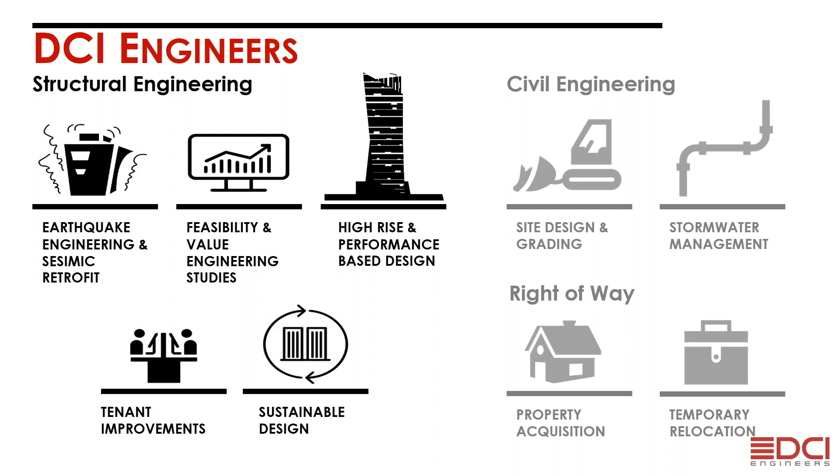But what we want to focus on today is different types of prefabrication and modular innovations and technologies that are being used. Some of these are already prevalent in the market. Precast concrete is obviously one that is used in a lot of parking garages. As concrete products go, there's also tilt-up concrete, which is typically used in warehouses, and there's the speed of fabrication of these elements as well as getting them on site to reduce the amount of labor needed to perform the construction.

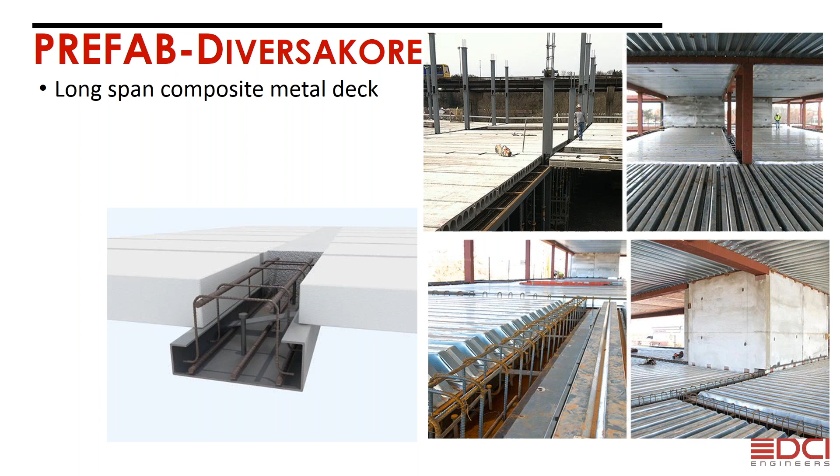Then we get into DiversaKore, a product that we use as well, combining the best of steel and concrete to give us longer floor spans and a more structurally efficient floor plate. Another proprietary product that we use on our projects is ConXtech, and the advantage here is that there's no welding, it's all bolted connections, so a lot less special inspections on site, which means less cost for the contractor, and they also go up very quick.

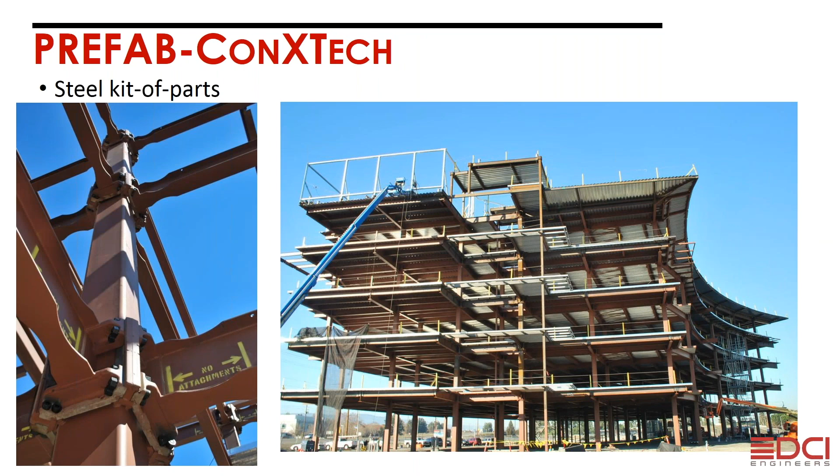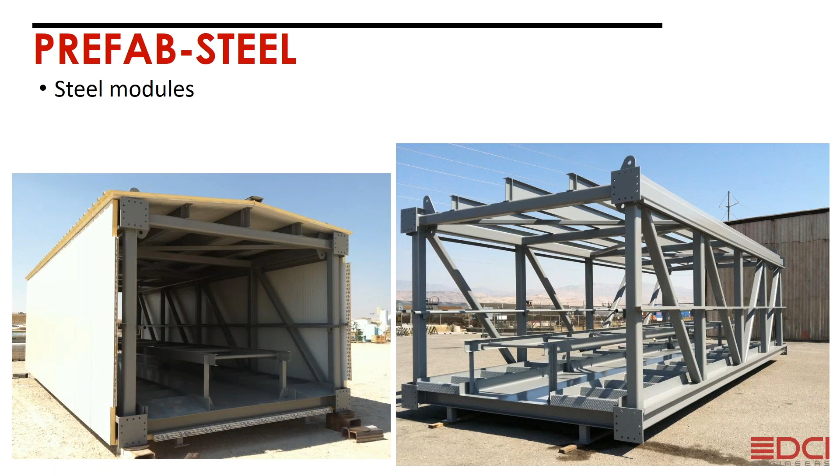Another thing DCI is very familiar with is steel module construction, where maybe it's a cold weather environment or a manufacturing facility that can't afford to have its facilities down for a couple of weeks and needs to perform a retrofit or construction over the span of a weekend. So we come up with these full-blown modules to be installed.

As far as modular and prefab, there's also a term referred to as kit of parts system, and we've had the privilege to work with Collins Woerman Architecture up in Seattle on this project. It's the Sustainable Living Innovation System, and as you can see in these pictures, your kit of parts building goes up kind of like Legos, where the beams and columns are installed, and then the floor plate is integrated with the MEP and utilities. This allows a very efficient project. It's very fast to install, and it's also robust with long floor spans.

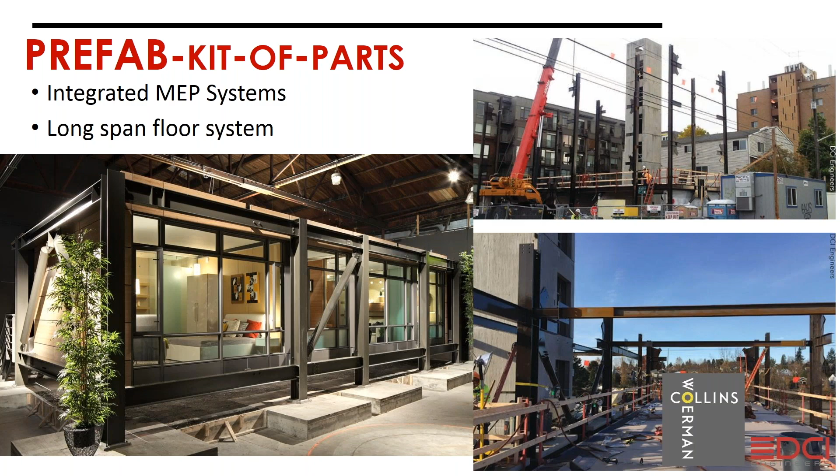But backing down into the more ubiquitous materials that we use in everyday construction for the majority of our projects, a lot of light frame materials, even with these we're seeing a lot more prefabrication. We see a lot of prefabricated walls, where the wall panels are prefabricated off-site, shipped to site on the back of a truck bed, as you can see here, and then installed.

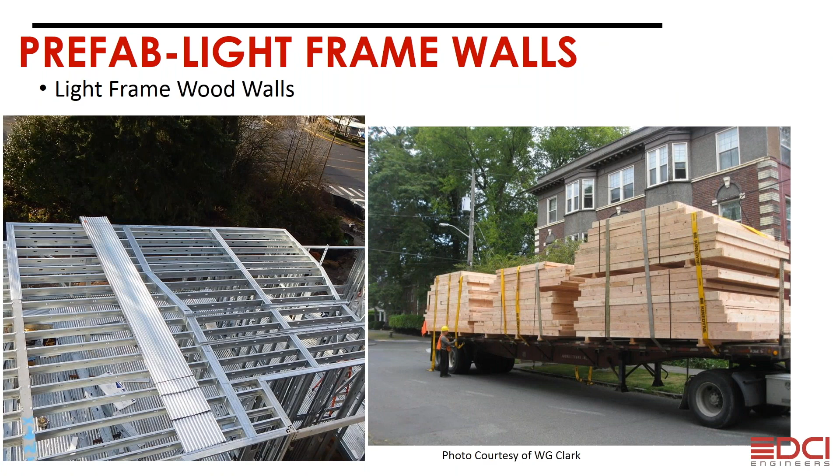If we take that one step further, we also do full-blown modular, or as other people call it, volumetric modular, where the whole unit is integrated. It can even have furniture installed if you wanted it to. These are brought on the back of a truck bed and then lifted up into place.

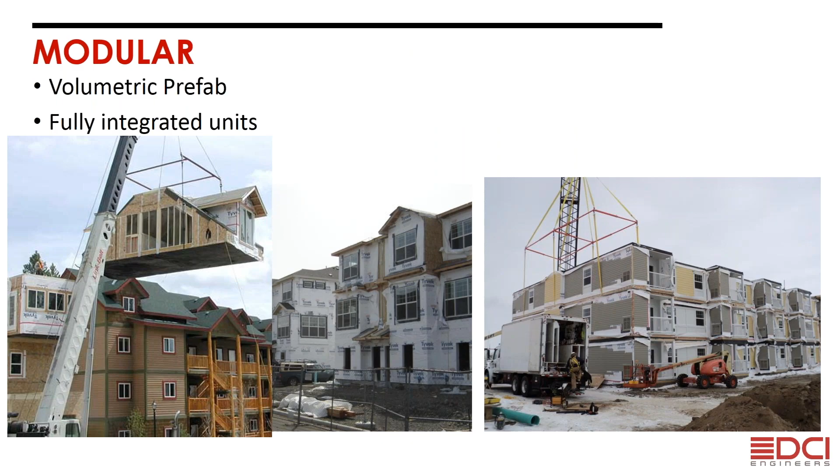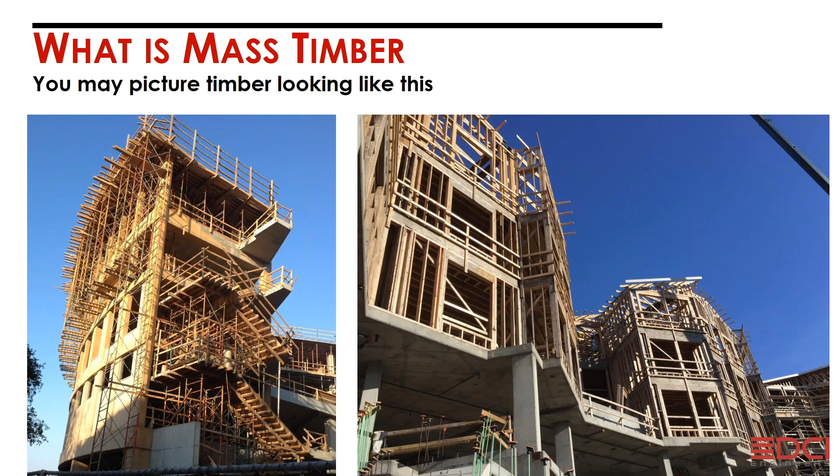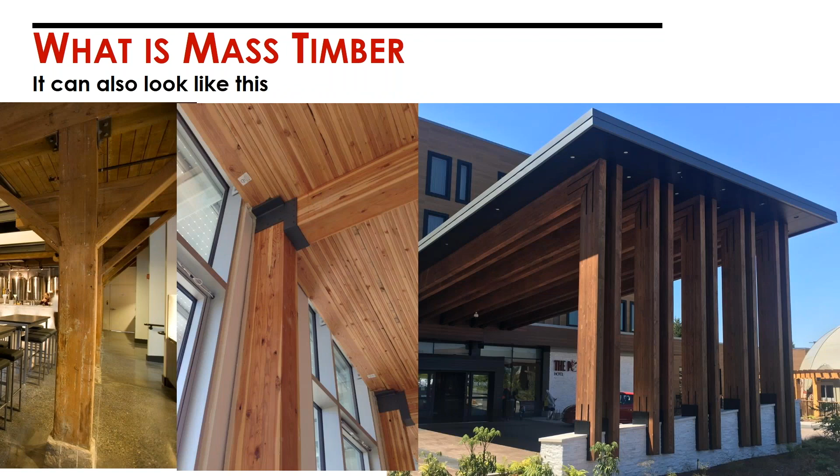But what we really want to talk about today is mass timber. Mass timber is different from what we're used to seeing in light frame construction. Light frame or stick frame construction is what you're seeing in these pictures here, whereas mass timber is a lot different. Instead of 2x4s or 2x6s spaced at 16 inches on center or so, you have larger sections of timber, usually 4 to 6 inches thick for floor plates, and columns or posts and beams that are composed of large engineered wood components.

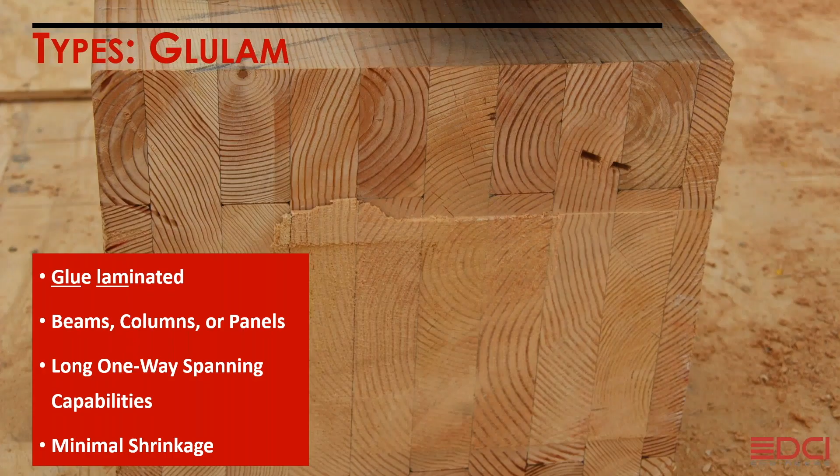And there's a lot of different types of mass timber, and we're just going to cover a couple of the key players that we see in the market that are coming up. One that is already prevalent and everyone's aware of is glulam. This has been around for over a century. It's actually the same technology, though, that's used on some of these other engineered wood products. Basically, it's 2x members that are put in a one-way span that can make posts, beams,

or even floor panels. In the same breath, the product that's been around for a long time is nail laminated timber, or NLT as it's referred to, and you're taking the same 2x members, stacking them up on edge, and then stitching them together with nails to make a large panel which has the prefab capabilities. But the real rock star that we see coming on in the market is cross-laminated timber, or what's better known as CLT. And its name comes from its inherent capacities.

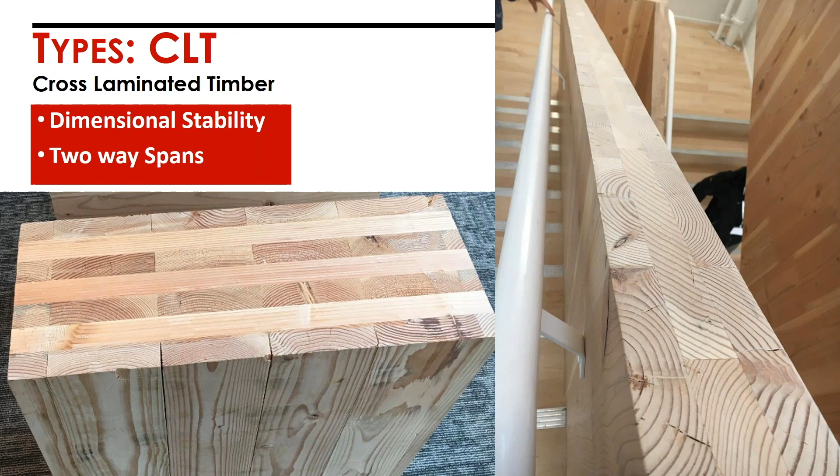As a product, you have the same readily available 2x lumber that is put in a layer, but as you can see in that picture on the bottom left, the layers are crossed perpendicular to one another. There goes the name, cross-laminated timber. And what that does is it gives the product immense dimensional stability that is comparable, if not better, than concrete and steel, as well as two-way span capacities. And when I say that, I mean that the product can span in both directions, which allows it to compete with steel and concrete buildings.

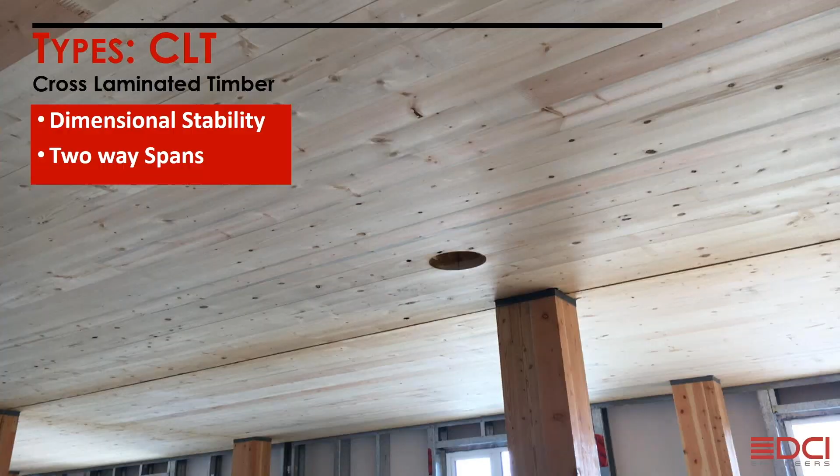And when we speak of mass timber buildings, one that's pretty prevalent that DCI was able to work on was the Bullitt Center up in Seattle back in 2012. And this was the first building designed to the Living Building Challenge. And what that means is this building is designed to last for 250 years, which is pretty amazing and changes people's perception of what a mass timber building has the capacity of.

And also, as you can see, there's also the aesthetic component, which is another selling point for our clients, as the natural spaces are very intuitive, as well as biophilia, which is a term that basically means humans are able to relate better to nature than they are to a cold concrete or steel surface. And therefore, they've actually done studies where they've gone into schools and hospitals and have found that the wood aesthetic is able to help patients in hospitals heal faster, and students actually have lower levels of anxiety and perform better on tests. And so if you want more information on that, I can definitely send those tests to you.

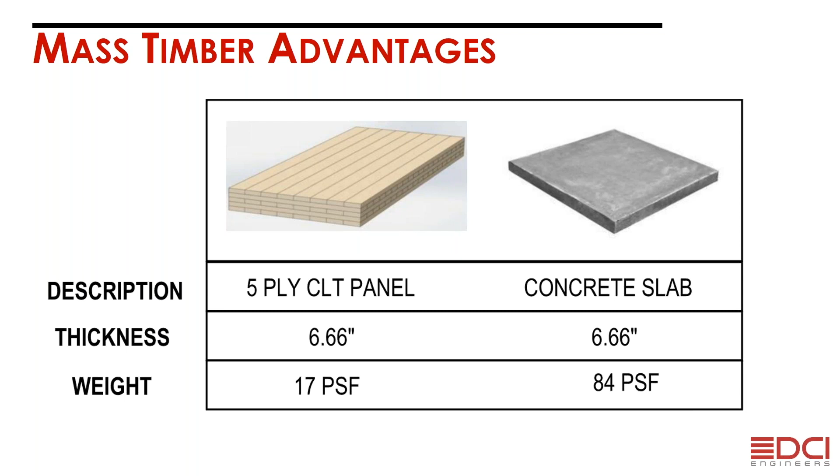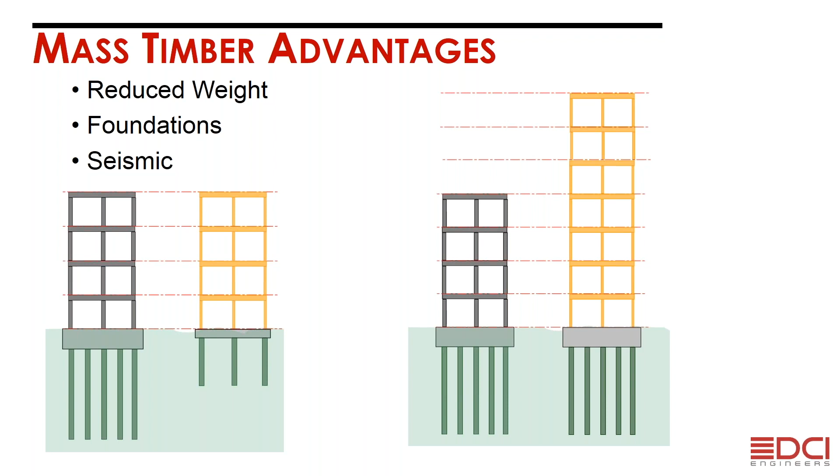The other inherent quality is that timber is a lot lighter than other products. You can see here an example with concrete. Concrete is about 4 to 5 times heavier than a mass timber product. And that really gives itself an opportunity for buildings because it's going to have a lot less weight, a lot less mass that we have to dissipate in terms of a seismic event, as well as you're spending a lot less money on the structure itself as far as columns, foundations, especially when it comes to piles.

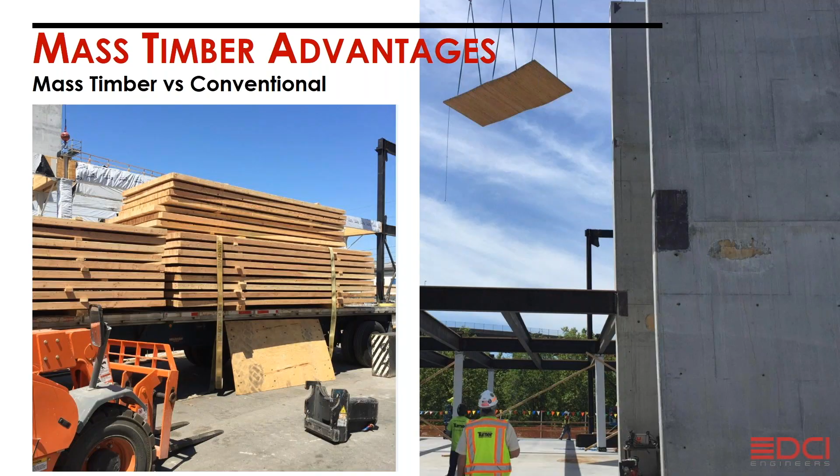Whereas you look at a mass timber building site, these are 10-foot wide by 40 to 60-foot long panels that are shipped on the back of a truck bed, lifted in the site with a crew of only 4 or 5 individuals that can lay out a 30,000 square foot floor plate in a week. So it's a very efficient and very accurate style of construction. Not only that, you're pulling from a larger labor pool. The construction industry is seeing a lot of shortages in specialty labor such as welders or iron workers. And here you have carpenters, which are using more ubiquitous tools such as hammers, saws, screws, and nails.

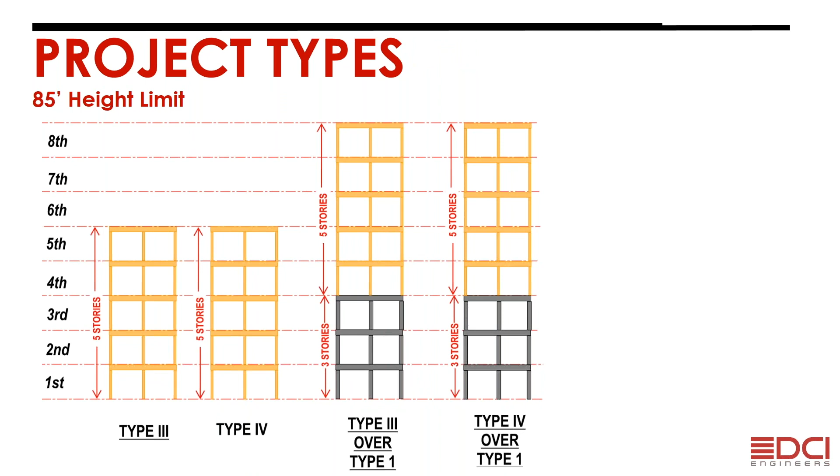And so where we're at right now is we're actually limited in our building codes at 85 feet. And we've been working with jurisdictions and in other cities on getting an allowable height increase for some mass timber buildings, as well as building more stories in mass timber.

But the overall picture I guess I would paint is that mass timber can be used in all types of buildings, smaller podium structures up to 85 feet. Really the mid-rise option is kind of what Europe has been practicing for the last 20 years, in the 8 to 12 story range, as well as now the UK and Australia have picked up on it. And I'm sure you've heard from the media a lot of talk about high-rise mass timber structures.

There's a lot of studies that say by the year 2050, the majority of our world's population will live in cities. So to densify those cities, we're going to have to build with taller structures. And what we see is that with mass timber, you have the speed of construction aspect, a smaller labor force pulled from a larger labor pool, and it's also a very sustainable and resilient material.